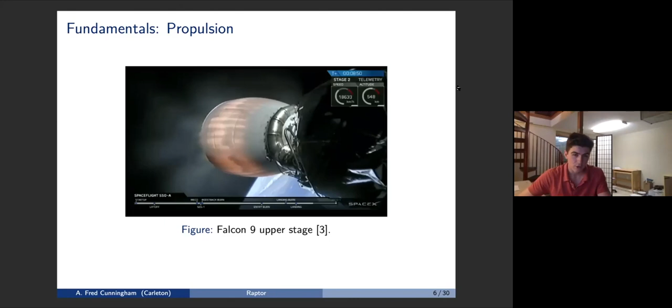There are some theories that at some point we may be able to utilize the quantum fluctuations in the vacuum and maybe transfer momentum to those instantaneously appearing particles. But all the methods that try to do that have failed. And so right now, the only way to move forward in space is to throw something behind you, to push off of some mass that you already have on your vehicle. And the Newton's third law reaction force from throwing that thing away from you is going to be the force that actually pushes you forward. So that's how a rocket works. It works by chucking stuff really, really quickly out the back.

So how do we get that stuff that we're throwing behind us up to speed? A common misconception is that it's the explosion of the fuel and oxidizer. Remember, we need an oxidizer because we're in outer space, there's no oxygen. So in order to get a reaction, we need both. So the explosion is not really what's causing that gas to speed up. If you did, say, ignite all your fuel and oxidizer right off the bat, you would force your rocket forward, but the exhaust gases would expand at subsonic speeds, or actually exactly sonic speed in a vacuum, but it would not go very far. You could look up a video of a rocket blowing up on the pad. The highest thing doesn't go that high.

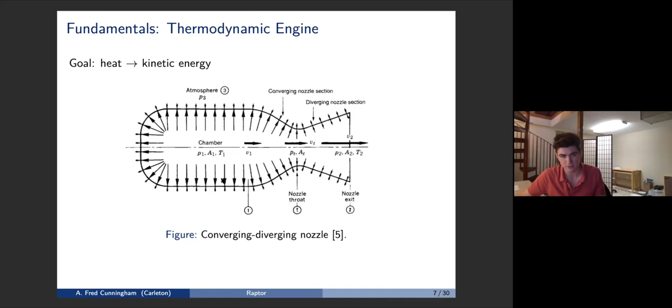And so what's really giving us this speed boost is the geometry of this nozzle here. What I want you to picture in your head is this combustion chamber as a heat injection point to a fluid that then gets compressed and expanded through this converging and diverging section. And it's that compression expansion that actually translates the initial heat from the combustion chamber into kinetic energy out the end of the nozzle. And so this nozzle shape is fundamental. Don't worry about these variables. We're going to actually return to this picture when we need them.

So an important thing to note is that we're focusing on combustion. That's not necessarily the only way to inject heat into our system, right? So here's some examples. We could have an arc jet thruster that uses an electrical arc with a high voltage to heat up some working fluid, which then gets pushed through this converging diverging section. Alternatively, we could use a nuclear reactor to inject heat.

And one interesting thing about this picture is you'll notice that we're using a hydrogen fuel tank here. And you might think, why are we using hydrogen if we're not actually going to be burning the hydrogen? Remember, the fuel is uranium or whatever the nuclear reactor is using. So keep that question in your mind. We're going to return to that later.

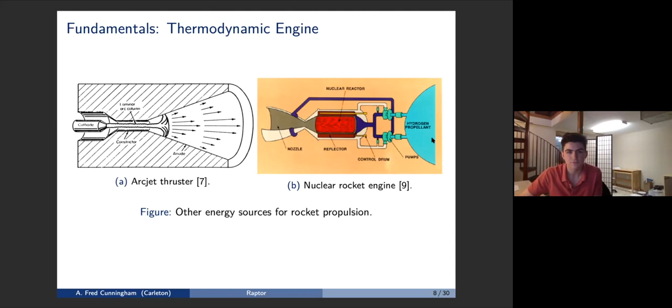Okay, so let's take a step back from the engine for a moment and talk about a rocket in flight and the dynamics that are involved. So really, as I was alluding to earlier, this whole process is working through conservation of momentum, right? As you chuck something out the back, you're giving it momentum, but you're also giving yourself momentum in the opposite direction. And so let's use that to derive the rocket equation.

So in this figure, I want you to imagine looking at a rocket that's stationary and then having it ignite its engines, and it zooms off in one direction and the exhaust mass zooms off in the other direction. And the total momentum of those two things is constant.

We denote that with P sub T here. And then the momentum of the rocket and the gas are going to change over time. So it's important, this U variable here is exhaust velocity, and we measure that relative to the actual rocket. So not from our rest frame where we're standing and observing the situation. This is exhaust velocity relative to the rocket itself.

This V is rest frame velocity of our rocket, and then this is mass and the change in mass over time. And note, it's important that this is a function of time because while a car burns its fuel to go forward, the change in fuel is so small we can just assume it's like constant mass. A rocket is burning over 95% of its mass as it goes from fully fueled to unfueled. So we have to account for changing mass in the dynamics.

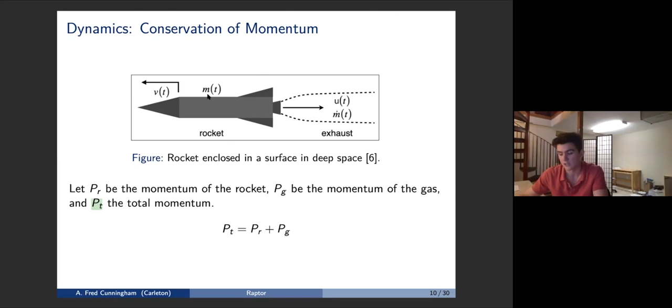Okay, so I just applied a derivative to the equation above, and we know that the total momentum is going to be constant, and so this becomes 0. And we can then just move this derivative operator into these terms. This term actually needs some explaining. So V minus U is going to be the velocity of the gas in our rest frame. And that makes sense because remember, the U is relative to the rocket. So if we subtract off the absolute velocity of the rocket from it and subtract off the relative velocity of the gas, we get the absolute velocity of the gas.

And so this term is going to be total momentum of the gas once you multiply by the mass flow rate and then integrate over time. So we can use the product rule here and the fundamental theorem of calculus on this integral, and we cancel these terms and we get this, which is the differential form of the rocket equation in deep space.

And it's only in deep space because notice there's no other sources of momentum on the system, right? There's no external force that could cause a net impulse on the system, right? So there's no gravity, there's no drag. We're just in deep space away from any gravitational bodies.

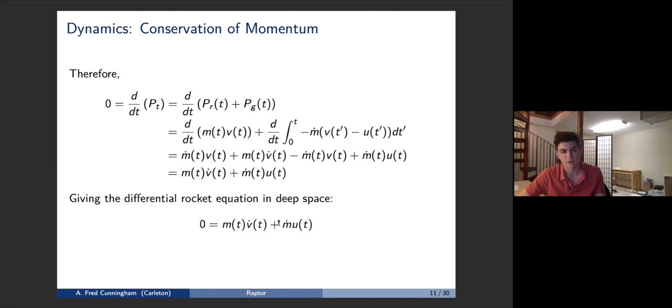So let's integrate this equation, and we can get the change in velocity is proportional to the exhaust velocity, and then there's this corrective factor which depends on the mass ratio. So what is this telling us? It's basically saying that our delta V, which is like what's the capability of a rocket, how much energy can we inject into our vehicle, is going to be basically solely dependent on the exhaust velocity of the engine, of the stuff we throw behind us to create thrust.

And so this U, exhaust velocity, is going to be the #1 parameter to judge rocket engines, because if a rocket engine can accelerate fluid better than another one, it's gonna have a higher exhaust velocity, and therefore it's going to make the entire vehicle more efficient. So exhaust velocity is going to be the parameter that we are going to be tracking through this whole talk.

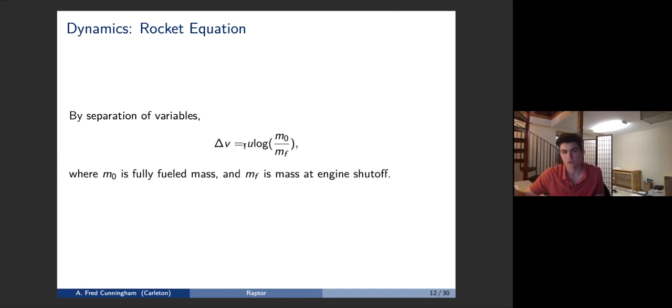Okay, so we've motivated exhaust velocity as a parameter using the dynamics of spaceflight. Let's now go back to the engine and let's examine the fluid flow through that converging and diverging section, and let's see if we can get an expression for exhaust velocity so we know what actually affects it. So to start off, we're back at this picture. This time I want you to pay attention to the variables. Note that all these variables are going to be scalar functions of space and time.

We can define the state at any point with a collection of these variables. So these are sort of like our state variables. We can't use traditional thermodynamic state variables like volume because we're not talking about any specific grouping of mass. We're just talking about a field, right, over space.

And so if we do have a volume reference, it's going to be specific volume, which is volume divided by mass. And so we're going to talk about stuff like specific internal energy, right? Internal energy divided by mass, and specific enthalpy, which I'll get to. I'll define that. So yeah, these are sort of scalar fields.

Another key thing is that we're going to make a quasi 1D assumption, which means that at every cross section of this nozzle, we're going to assume that all these state variables are constant along the entire cross section. And that makes our variables effectively one-dimensional and just functions of x, which is going to be this direction. And that brings in some error into our results, but we can deal with it. It's not that bad.

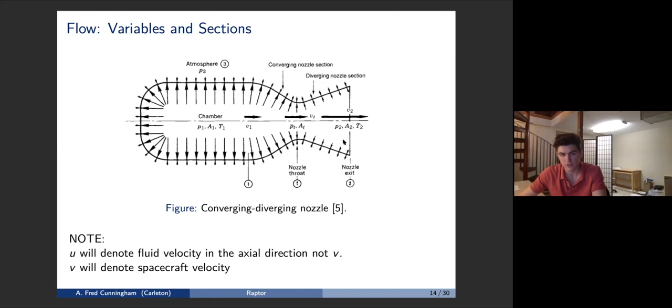Okay. So one thing we just need to assume, because it would take too long to prove, is the isentropic relation. And this is a relation between our state variables. We've got pressure, density, temperature at different sections, right? So this is temperature at section 2, section 1. This gamma here is a gas-specific constant that I'm going to talk a little bit about later.

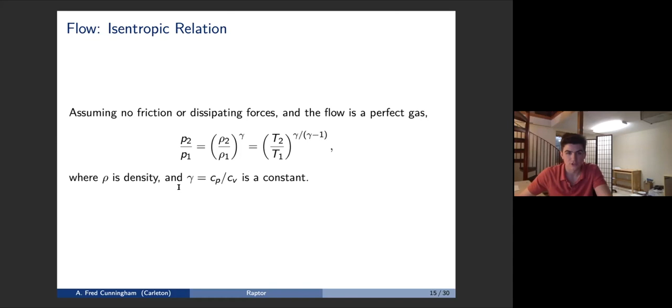But although we're not going to derive this, I want you guys to just remember the assumptions we're using in order to use this, which is that the fluid passing through the nozzle is a perfect gas. And also there's no heat transfer from the fluid to the nozzle and then out into the environment. It's a completely adiabatic, is what that's called, system. And again, this assumption is not true, but the errors that it introduces are manageable. So this is the isentropic relation.

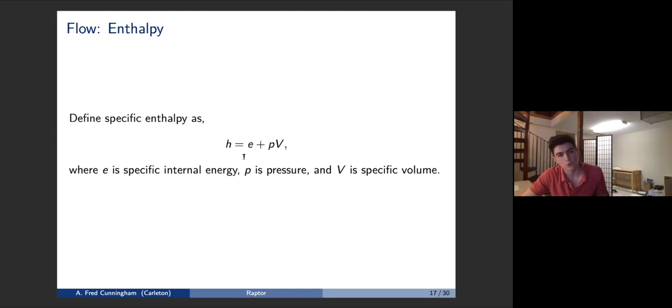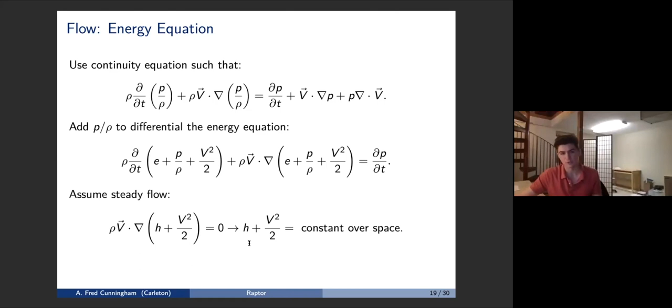And if we just plug in our quasi 1D assumption that we stepped away from earlier, we can just use U here, which is our one-dimensional velocity, and we call this term total enthalpy or static enthalpy, and it's constant over space. Okay, so we've got static enthalpy, we've got our isentropic relation.

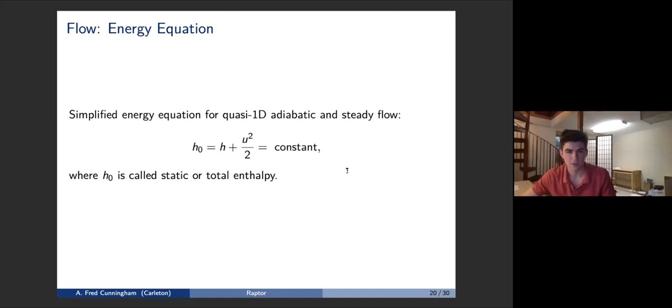We need one more thing to fully derive exhaust velocity, and that is this relation here. So specific heat is just going to be the amount of heat that you need to raise the temperature of an object for 1 degree. This is not specific heat. Sorry, this is heat capacity. Sorry, I misspoke.

So we have heat capacity is the amount of heat that you need to inject to raise the temperature 1 degree. We can substitute in the change in internal energy minus work for heat. And then we do some algebra and we get the differential form. And now we can divide by mass and get specific heat.

And you'll notice that total internal energy divided by mass is total specific internal energy. Volume divided by mass is specific volume. And heat capacity divided by mass is specific heat capacity. So that's where this equation comes from.

Now we're going to make another assumption on top of our assumptions that there's no heat flow out of the fluid, there's no time derivative at any point, and the quasi 1D assumption. We're adding another assumption that the heat capacity is constant, and that's called a calorically perfect gas. And by assuming that, we get this nice relation that enthalpy is going to be proportional to temperature at any point.

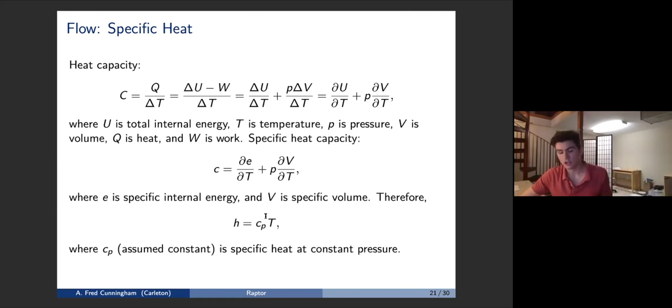So finally, using that proportionality and using our isentropic relation and our static enthalpy equation, we can get these results. So we just do some algebra here. We use our enthalpy temperature proportionality to set it equal to this, and then we solve for exit velocity, and we end up getting this.

Now we can convert this term to this term using the isentropic relation, and we can convert CP into these other gas-specific constants. I'm not going to show that, but I hope you believe that since these are just things that are specific to the gas, they should be interchangeable in a way. So K is Boltzmann's constant, M is the average molecular mass, and gamma is the ratio of the specific heats at constant pressure and constant volume.

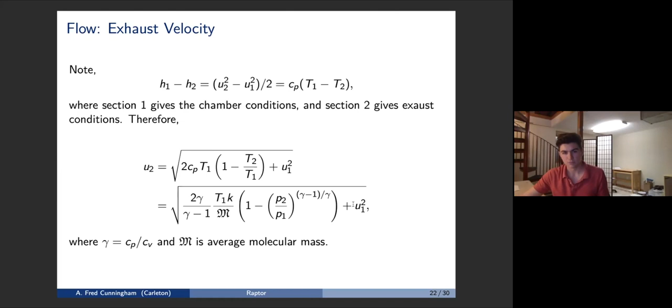And so we've arrived, right? We've got an expression for how fast our gas is moving as it exits our rocket. One more thing we're going to note is that U1, which is the velocity right at section 1, or at the end of the chamber, is going to be approximately 0 because the gas is moving very slow in the combustion chamber. We just think of the combustion chamber as adding heat, not velocity. So this pretty much goes to 0. So let's just look at this equation without the fluff around it for a second.

There's really two things that stand out from this equation if you look at it for a while. The first one is that there's two ways to affect exhaust velocity. The first one that stands out is the chamber conditions, right? So the T1 and P1, if we raise those as much as possible, we're going to be raising U2 here, and that sort of makes sense, right? Because the more intense the chamber conditions, it's like we're pushing that gas through the nozzle with more and more intensity in a very informal sense. But I hope that makes sense intuitively.

And it's interesting that the Soviet and United States programs, when they were put into isolation in the Cold War, looked at this equation and came to different conclusions. The Americans decided, okay, the easiest way to improve efficiency is going to be with our chemical properties. We've got limitations with our mechanical engineering and our materials properties. Let's just focus on the fuels.

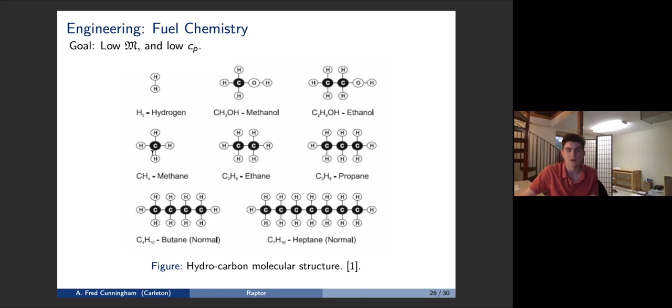So methane, which is what the Raptor is using, is sort of a Goldilocks fuel, right? So if we look back here at methane, we've got the most hydrogen we could possibly get without having the problems of hydrogen, right? We've got much higher density by volume, as you can see here. And additionally, the exhaust products are not that bad, and it's sort of an in-between fuel, right?

Also, it can be made on the surface of Mars, which is crucial if you're trying to get back to Earth from Mars once you arrive there. There's no dead dinosaurs under the Martian surface that we can dig down and unearth and then burn in order to get out of the gravity well.

So hydrogen adds too much weight and complexity and annoyance, and kerosene is just not going to work on Mars, and it's just inefficient in general. Methane is an in-between fuel that works great, and it's very practical.

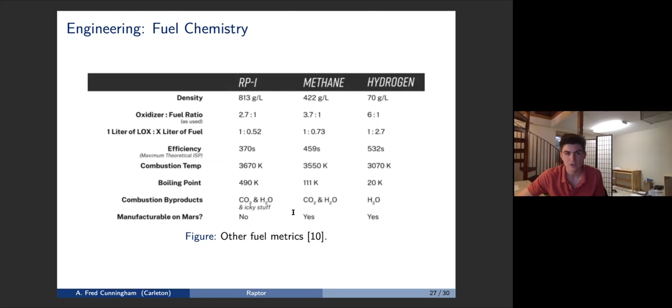Combines efficiency with practicality. Okay, so we talked about the fuel chemistry side of the optimization. Let's now talk about what the Russians were super focused on, which was engine plumbing, and just raising that combustion pressure and temperature as high as it can possibly go.

So let's think for a second about how we might do this naively. Well, if we want to raise chamber pressure, we could just raise the tank pressure, because the tanks are feeding into the chamber, right? But again, if we want to raise it higher, we're going to get those tanks being overly massive, right? They're going to have to be super heavy to contain that much pressure, and that's not going to be good. So instead, we keep our tanks normally sized, and we use pumps to pump the gas into the combustion chamber at high pressure.

These pumps could be powered by an external fuel source, and actually some rockets did use a third fuel to power their pumps. But people eventually realized, look, we've got a fuel line and an oxidizer line running right by this pump, this generator, why don't we just use that as the fuel to run the pumps? And so the gas generator cycle is this idea where you take some of your fuel from your fuel side, some oxidizer from your oxidizer side, you burn it in a pre-burner combustion chamber, which then will drive a turbine, which drives these pumps. And the exhaust from the turbine just gets chucked off the side.

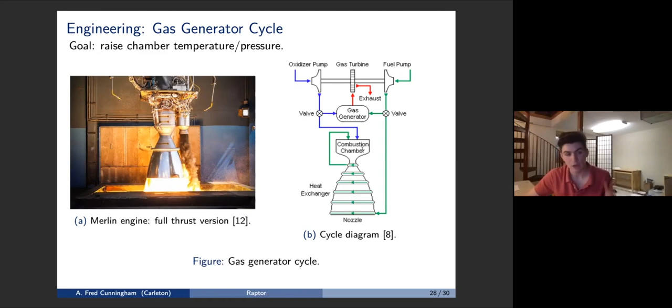Additionally, the fact that we're using methane now is a huge bonus, right? Because methane is not as gunky and sooty as kerosene would be, and so we can really run it back into this combustion chamber without clogging much stuff up, which is great for reusability.

On the oxidizer side, we still have that problem of the superheated oxygen having a reaction risk with the metal. But SpaceX developed an incredible alloy that is going to be very resistant to this reaction, and that seems to be working so far. So they haven't burned their turbines up yet with the superheated oxygen. So they seem to have solved that problem.

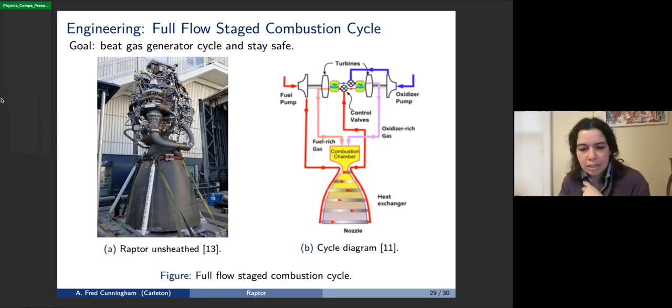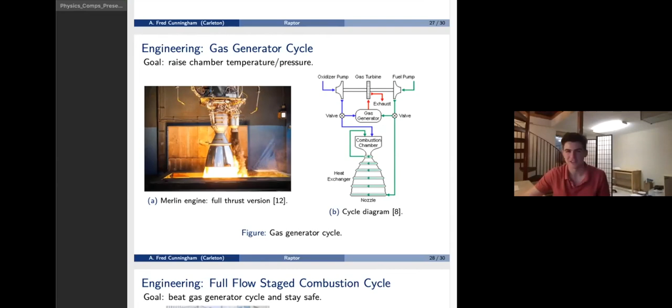So after graduation, are you going to go work at Blue Origin or SpaceX? We'll see. I might need to work on some grad school acceptances before that, but

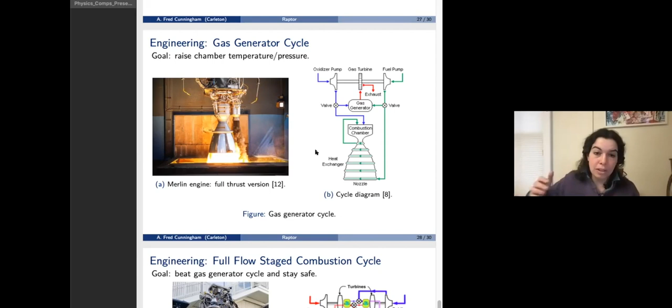Well, I'll ask one while people think about it. So intuitively, I understand, if you raise the pressure and the temperature, that you would increase your velocity. But if I look at the equation, P1 was in the denominator. So could you go into a little bit more parsing that out? Yeah, we can go back to that. I think it's on 23.

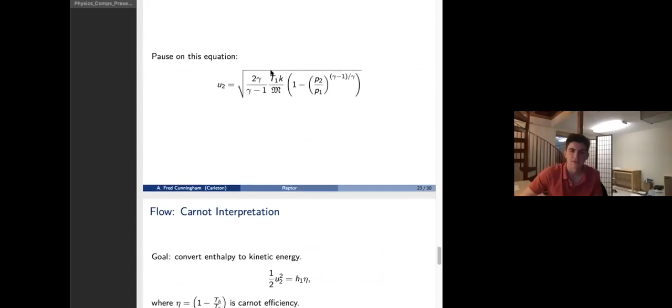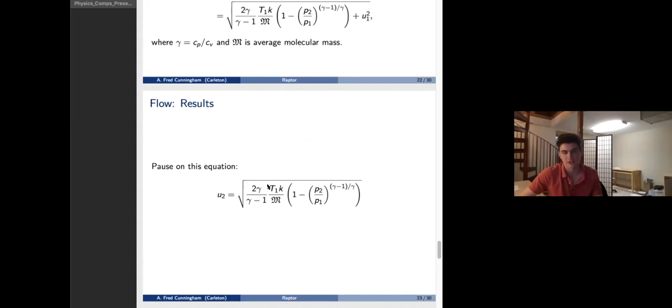Right. So P1's in the denominator, right? But it's in this ratio. And so we want to drive this term to 0 actually, in order to get this big parentheses term to be optimal. And you could also just take temperature 1 and use the perfect gas law to substitute in for pressure. Yeah, that's how I figured it out, but I was caught on the last little bit.

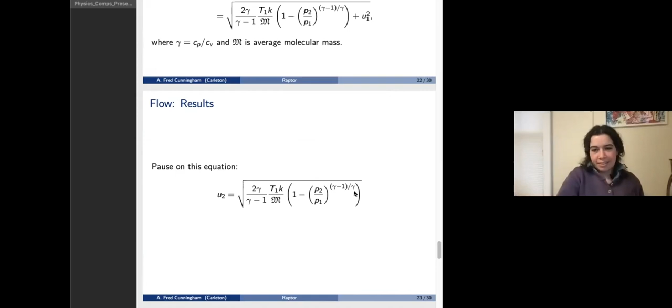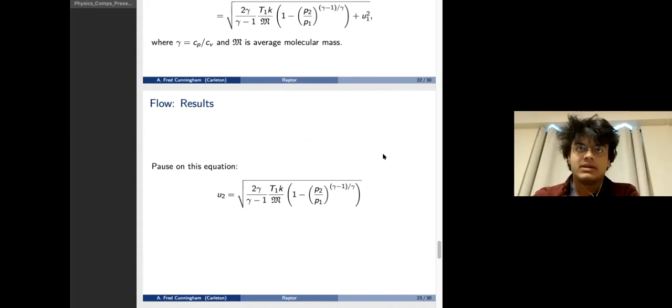Kieran, do you want to ask yours? Sure. So I could be mistaken, but it seemed like the analysis of your engine was done assuming inviscid flow. How would that equation you derived change if you accommodated for viscous effects? Yes, that's very good, Kieran. We are tacitly assuming inviscid flow. And I will show you where we get the change. The change is in this energy equation, where we have to add on. There's not a good closed form for it because it's a very non-conservative effect.

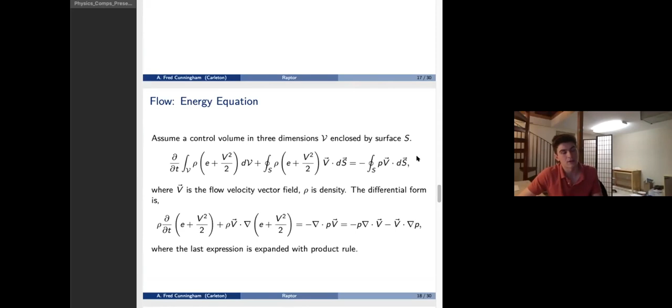For people that don't know, what Kieran is talking about is viscous forces along the boundaries of the flow, and that causes inaccuracies in this model. But for now, we're just assuming that the edges are perfectly smooth and the flow just goes right by without any friction or any heat transfer.

And that actually provides a useful insight for rocket design, because you want to get those walls of your combustion chamber and converging diverging junction as smooth as you possibly can. Any little bump is going to become a point where your kinetic energy gets converted back to heat, and it's just going to immediately melt through the wall of the rocket. So good thing to bring up, Kieran.